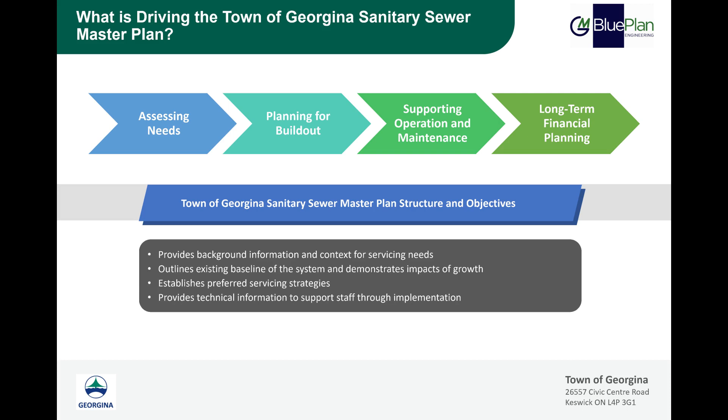The master plan evaluates the ability of the existing and planned wastewater infrastructure within the town of Georgina to efficiently and effectively service the town's existing population, support forecasted growth, maintain or improve service levels, improve system resiliency and operational flexibility, and consider the long-term financial viability of the system. These objectives have served to guide the master planning process from the initial assessment of the existing system to the development and evaluation of alternatives.

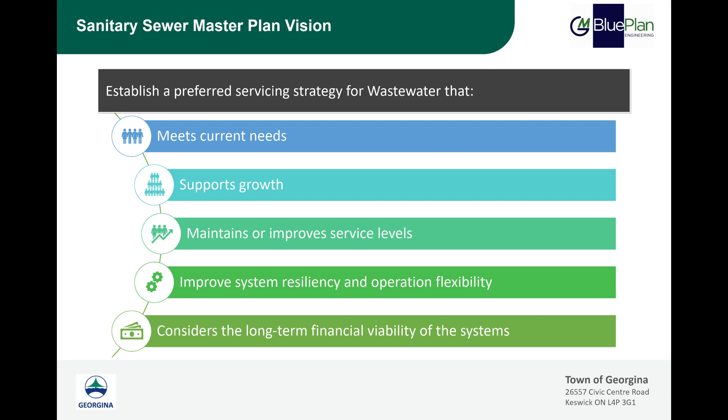The Sanitary Sewer Master Plan sets out to meet the requirements of the Municipal Engineers Association, or MEA, Class Environmental Assessment process, which involves the completion of Phase 1 and Phase 2 of the Class EA process for master plans. Phase 1 of the process focuses on identifying the problem and opportunities, and Phase 2 of the process involves the identification and evaluation of alternative solutions. We are currently in the second phase.

The Sanitary Master Plan focuses on build-out potential within the town's urban settlement boundary in order to provide clarity in the long-term infrastructure needs and to provide more flexibility to respond to changes due to growth uncertainty. The location and rate of growth are two factors which impact the town's infrastructure needs and when it should be implemented. The general methodology for growth allocation is as follows. The town tracks all submitted development applications and ensures that there is sufficient wastewater treatment capacity to support future developments. Draft plans, or draft plan concepts, are available for many of the larger development applications. This development data was used as a baseline for growth allocation.

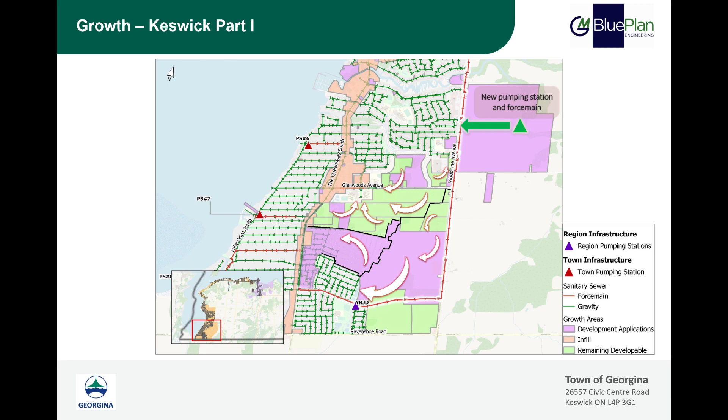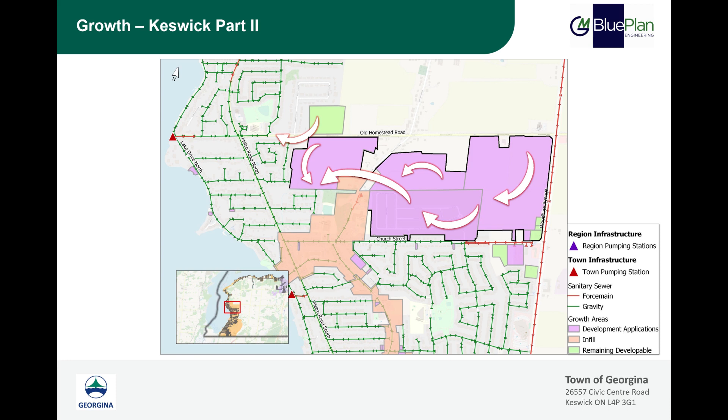The following 3 slides present the general servicing concept with arrows representing the general direction of sanitary drainage for large developments within Keswick and Sutton. This figure focuses on growth lands bounded by Ravenshoe Road, the Queensway South, Biscayne Boulevard, and Woodbine Avenue. This figure focuses on growth lands bounded by Church Street, Metro Road North, Old Homestead Road, and Woodbine Avenue. This figure focuses on growth lands within the community of Sutton.

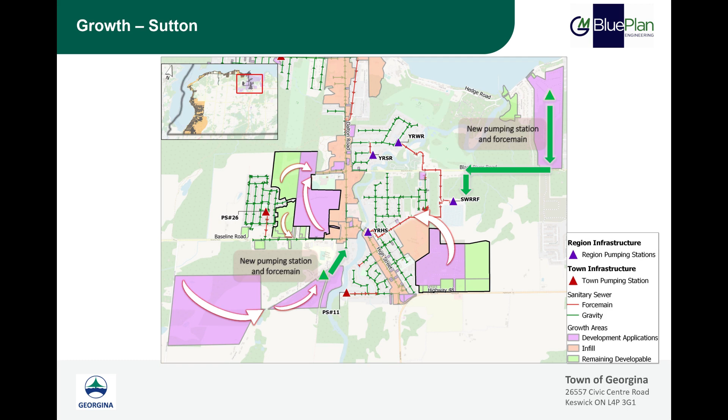Once all alternatives were evaluated, the preliminary preferred alternative was identified using the reasoned argument approach. The reasoned argument approach does not use an overall numeric scoring system, but focuses on identifying clear and thorough rationale and trade-offs among alternatives based on each alternative's anticipated impacts and benefits. The basis of this approach is to qualitatively evaluate the relative advantages, disadvantages, impacts, and benefits of each alternative.

Inflow and infiltration is a common term that will be used throughout this presentation. Inflow and infiltration refers to extraneous groundwater and stormwater that enters the sanitary system through cross connections with the stormwater system or through cracks and other imperfections within the sanitary system. Some potential sources are presented in the figure on the left and can include roof drain connections, uncapped sewer cleanouts, storm sewer cross connections, faulty sanitary sewer lateral connections, faulty manhole cover or frame.

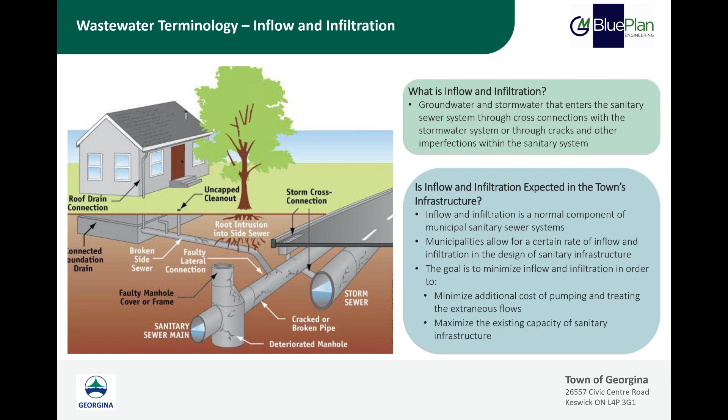This slide highlights some of the opportunities and constraints within the community of Keswick. The area serviced by the Keswick Water Resource Recovery Facility is shown on the map in green. Willow Beach is shown on the next slide and is also serviced by the Keswick Water Resource Recovery Facility. In general, the impacts of growth on the existing sanitary system are minimal. Overall, the town's existing sewer network is well equipped to support future needs. Problem areas and recommended infrastructure upgrades will be discussed later on in this presentation.

The main constraints within Keswick are as follows. There are areas of high inflow and infiltration, which are shown on the map in red. Inflow and infiltration refers to groundwater and stormwater that enters the sanitary system through cross connections with the stormwater system or through cracks and other imperfections within the sanitary system. There are long-term treatment capacity constraints at the Keswick Water Resource Recovery Facility, which is a York Region facility. Treatment capacity upgrades are identified and planned through the York Region's Master Plan. There are existing design capacity constraints at 4 local pump stations and 2 regional pumping stations within the Keswick Water Resource Recovery Facility service area.

With these constraints in mind, the following opportunities were considered in the development of alternatives. Manage inflow and infiltration to help address areas experiencing sewer capacity constraints. Strategic sanitary sewer upsizing to support all future development in growth areas. Consider ongoing renewal and replacement of existing sewers. Opportunity to prioritize and coordinate sewer upgrades with planned sewer replacements due to age or condition, or other infrastructure projects such as road reconstructions. Evaluate life cycle costs of alternative solutions to better understand the financial implications of the preferred alternatives.

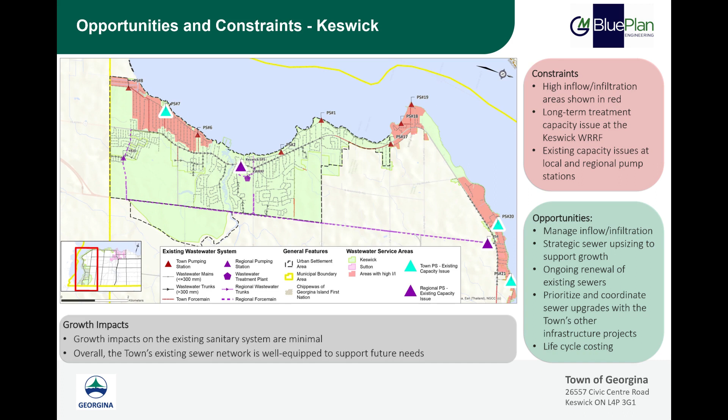This slide highlights the opportunities and constraints within the community of Willow Beach and Sutton. The area serviced by the Sutton Water Resource Recovery Facility is shown on the map in pink. As mentioned on the previous slide, the overall growth impacts on the existing system are minimal, considering the amount of projected growth to build out. The main constraints are similar to those in Keswick and are as follows. There are areas of high inflow and infiltration, which are shown on the map in red. There is a long-term treatment capacity constraint at the Sutton Water Resource Recovery Facility, which is a York Region facility. Treatment capacity upgrades are identified and planned through the York Region Master Plan. There are existing capacity constraints at 1 regional pumping station within the area serviced by the Sutton Water Resource Recovery Facility. The opportunities within the sanitary system in Sutton are shown on the right-hand side of this slide. They are similar to the opportunities in Keswick and were discussed on the previous slide.

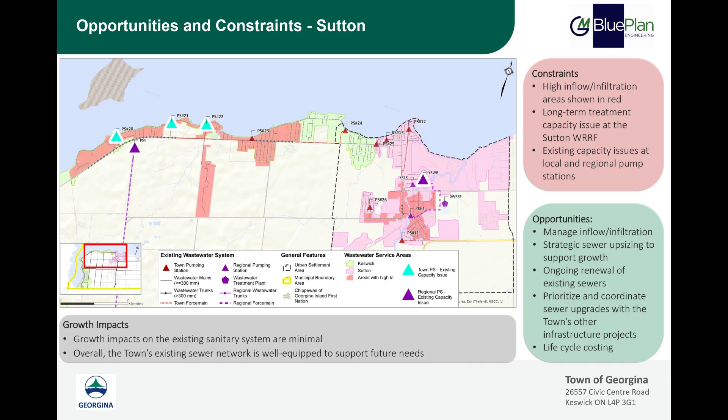Areas with sewer capacity constraints were identified through the assessment of existing and future sanitary system performance. These areas were categorized into the following groups. Growth-related capacity upgrades, where the capacity issue is triggered by future growth. Existing broader system issues, where there is a cluster area of constrained sewers that is not triggered by future growth. And existing localized issues, where there is a relatively short segment of constrained sewers and there is little risk of basement flooding. These categories were identified in order to streamline the process of identifying servicing concepts and evaluating potential alternatives.

The first servicing concept is the do-nothing option. This option is generally recommended in cases where there is little to no risk of basement flooding, future operational adjustments may address these issues, or the cost of other alternatives is high and do not provide sufficient benefit. The next servicing concept is the capacity upgrade option. This is generally recommended in cases where an increase in sewer size or pump station capacity would address the system constraint and inflow and infiltration reduction is not feasible.

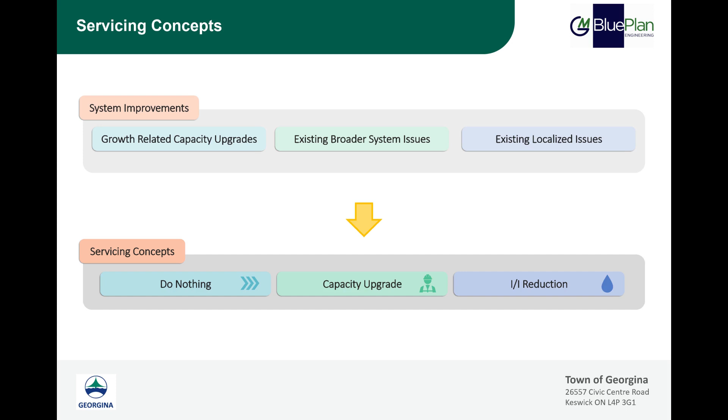The third servicing concept is inflow and infiltration reduction. This option allows the capacity of the existing infrastructure to be maximized and is generally recommended in cases where reduction of extraneous flow entering the sanitary sewer system is likely to address the system constraint and the constraint is located within a priority inflow and infiltration area, which were highlighted in the Opportunities and Constraints map.

This slide presents the two areas where there are existing broader system issues and the servicing alternatives that were considered for each area. The figure on the left presents the Eastbourne area where there are existing sewer capacity constraints along Lake Drive North. Alternative 1 would consist of upgrading the capacity of Pump Station 20. However, this would not address all the sewer capacity issues.

Alternative 2 would consist of upsizing the sewer along Lake Drive North. A significant length of sewer upgrades would be required, and it should be noted that the existing sewer was installed in 2003, so the sewer still has a significant portion of its expected life cycle remaining.

Alternative 3 would consist of implementing an inflow and infiltration reduction program within the area, which has been flagged as an area of high inflow and infiltration. This option has the potential to maximize the existing capacity of the sewers and reduce ongoing pumping and treatment costs. The evaluation of these alternatives is presented on the next slide.

The figure on the right presents the Jackson's Point area where there are existing sewer capacity constraints within the sanitary sewer within the easement from Wheeler Avenue to pumping station number 12 on Lawrence Street. Alternative 1 would consist of upsizing the sewers along the existing alignment in order to address the capacity constraints. There is opportunity to address the capacity constraints with the planned replacement of the existing sewers as they are aging and approaching the end of their life cycle. However, the existing easements are encroached, which brings added complexity to the construction approach needed to replace the sewers.

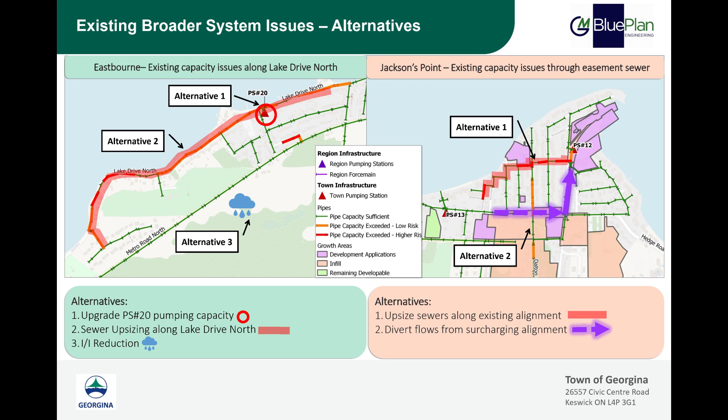This slide presents the evaluation of alternatives for each of the problem areas discussed on the previous slide. The figure and table on the left show the preferred alternative of inflow and infiltration reduction for the Eastbourne area. Alternative 1, Pump Station 20 upgrades, was not selected due to the low technical feasibility score, as pumping capacity upgrades alone would not address all the sewer capacity constraints.

Alternative 2, sewer upgrades, has a high technical feasibility score. However, financial viability is low due to the high capital cost of the sewer upgrades that would be required and the high net life cycle cost for the remaining life of the existing sewers that would be replaced. Further, the environmental impacts are moderate as the sewer alignment is very close to Lake Simcoe, and the social cultural impacts are moderate as the construction impacts on the residents would be more significant compared to Alternative 1, Pump Station 20 upgrades.

Alternative 3, inflow and infiltration reduction, has the advantage of maximizing the life and capacity of the existing sewers and reducing ongoing pumping and treatment costs. The expected capital cost and net life cycle cost for Alternative 3, inflow and infiltration reduction, is lower than Alternative 2, sewer upgrades, and thus scored moderately.

The figure and table on the right show the preferred alternative of sewer upsizing along the existing alignment for the Jackson's Point area, Alternative 1. In general, the technical feasibility score was moderate compared to Alternative 2, diversion, due to the complexity of sewer construction through the encroached easement. However, based on the expected capital cost and net life cycle costs for the two alternatives, Alternative 1, sewer upgrades, is preferred.

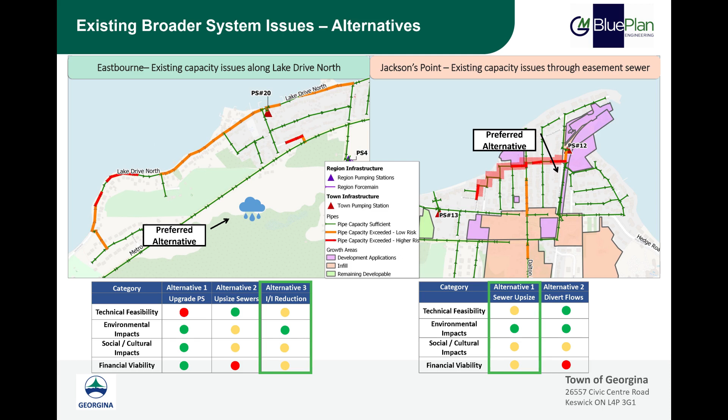This slide presents the 4 sections of sewer capacity upgrades, which are recommended for the town's capital program. The evaluation process for these areas was more straightforward. As such, detailed evaluation tables are not shown.

The figure on the left shows the extent of sewer capacity upgrades recommended on the Queensway South from Henry Street to Morton Avenue in order to address the existing network capacity issues. The capacity upgrades would support the existing users as well as the planned growth in the area due to infill and intensification along the urban corridor. Inflow and infiltration reduction was not a viable option, as this area is not an area of particularly high inflow and infiltration.

The second figure from the left shows the extent of sewer capacity upgrades recommended on Cottage Grove to Metro Road North in order to address existing network capacity issues. The sewer receives flow from Pump Station 20's force main and is undersized for the capacity of the station. There is no growth planned in this area.

The second figure from the right shows the extent of sewer capacity upgrades from Market Street to High Street, which are needed to support future growth in southeast Sutton. The town has been planning upgrades along this alignment with the developer. However, additional upgrade needs have been identified as the master plan considers full build-out of the remaining lands.

The figure on the right shows the extent of the sewer capacity upgrades recommended on Dalton Road, south of High Street, and on High Street from Dalton Road to the York Region High Street Pumping Station, which are needed to support future growth in southwest Sutton.

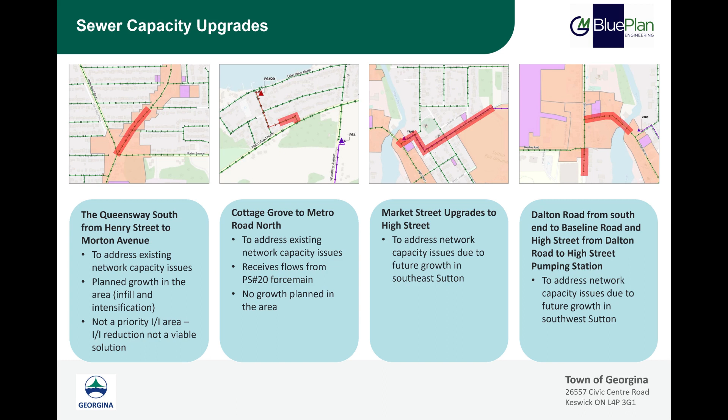Inflow and infiltration reduction also serves to reduce overall pumping and treatment volumes, which reduces cost and maximizes the usage of existing pumping and treatment capacity. Inflow and infiltration reduction studies in the flagged areas will be recommended as part of the town's capital program.

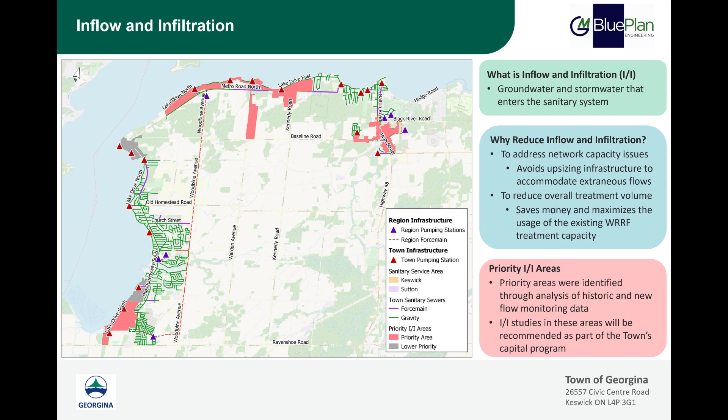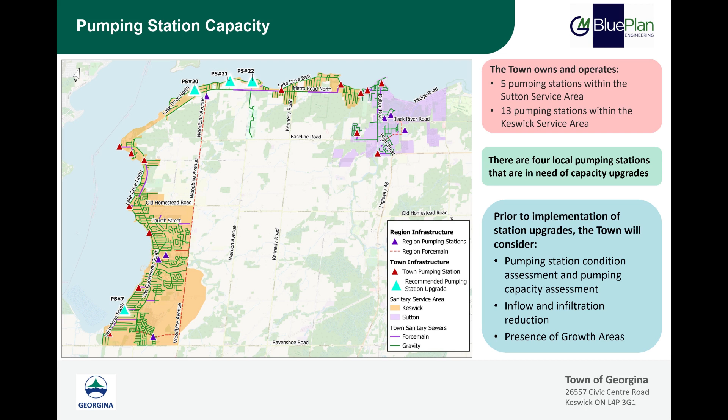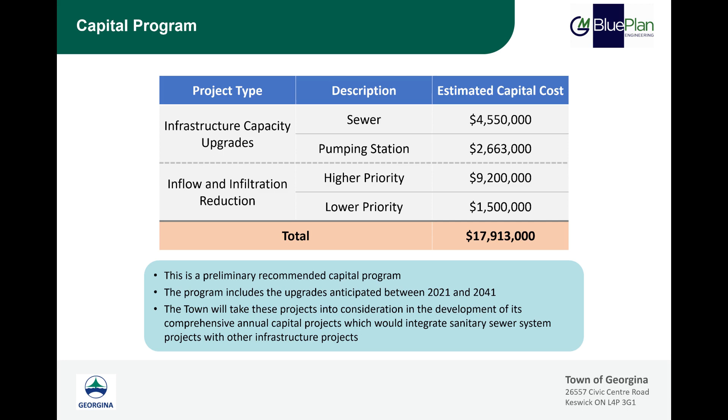This slide presents a summary of the infrastructure upgrades and inflow and infiltration reduction projects that will be recommended as part of the town's capital program, along with their estimated capital costs. Note that this capital program includes the upgrades anticipated between 2021 and 2041. This is a preliminary recommended capital program, and the town will take these into consideration when developing its annual capital projects, which would integrate sanitary sewer system projects with other infrastructure projects such as road reconstructions, water main replacements, and sewer replacements, among others.